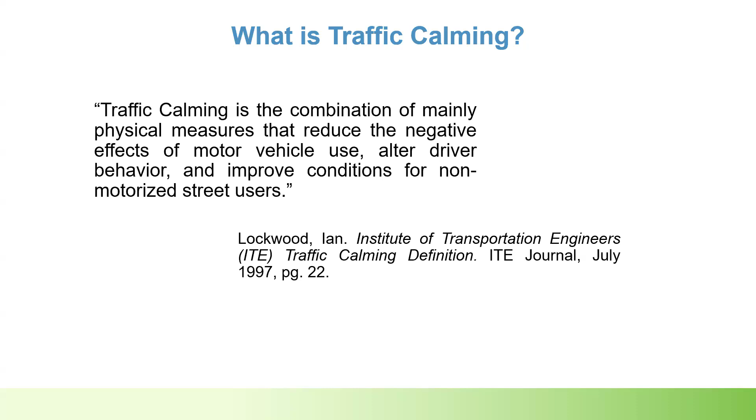The traffic calming program here in Ann Arbor is designed to provide residents with a formal process for engaging with the city in a partnership to perform a technical analysis of traffic concerns. This is for local streets, to explore potential solutions using fundamentals of traffic calming. It's a 5-step program, and Wade Trim is currently assisting with step 2 up to a portion of step 5. We'll briefly describe each step, but there is a guidebook available online, which you should have also gotten in your initial mailing with the questionnaire. It has way more detail if you want to review anything after this meeting.

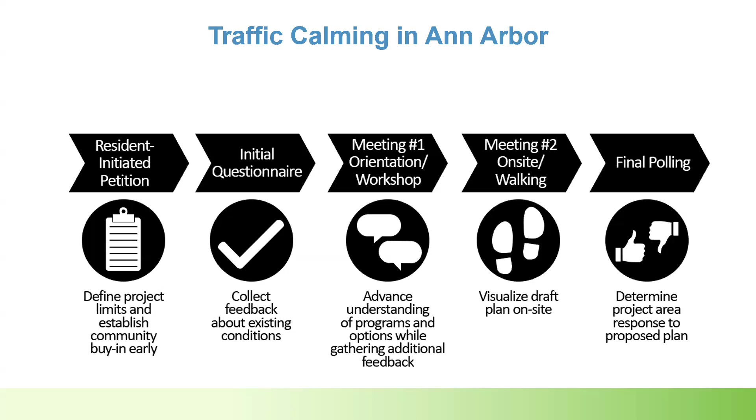Step 1 is the resident-initiated petition. This neighborhood project started with one of your neighbors acting as a petitioner who submitted a request to the traffic calming program. The request was for Redwood Avenue from Springbrook to Platt, Rosedale Street from St. Aubin to Redwood, and Springbrook from St. Aubin to Redwood. So this project area was defined by the petitioner. They gathered signatures from other residents who also live within that area and sent it out with the application to the traffic calming program.

Here's a summary of the results. The requirement for the traffic calming program to accept the request is that at least 50% of that defined project area must support the project, and then the city does a preliminary technical study that must yield at least 10 points. With this project, your petitioner collected signatures from 65% of the project area, and the preliminary study that the city did resulted in 31 points. There's a breakdown of the points posted on the project website if you'd like to check that out. In summary, yes, this qualified.

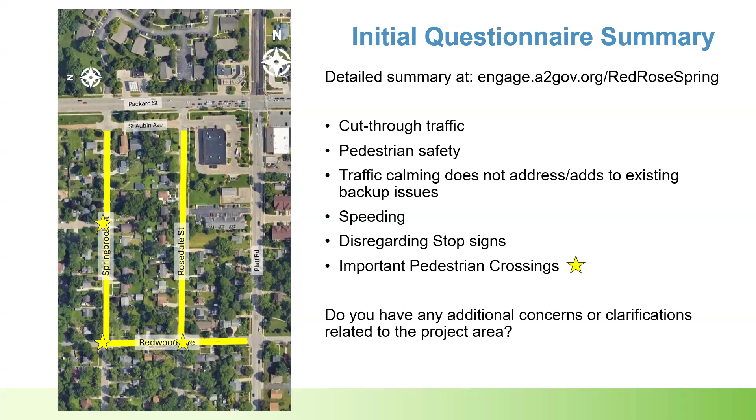And then step 3 is where we are today, so this is where most of our focus will be for the rest of the meeting. Before we present the starter idea, we'll go through an overview of the device toolbox described in the program's guidebook.

I will launch another poll here. This is asking, have you reviewed the traffic calming guidebook, specifically the device toolbox found on pages 9 to 12? I'll give you a moment there.

There was another note here: the pedestrian traffic will be hard to discuss without including the crosswalks on Platt. We are only able to focus on the study area, and the program defines only local roads. So unfortunately, if there are notes or things we want to include about the surrounding area, feel free to bring those to the table, but ultimately we can only make decisions that affect the project area.

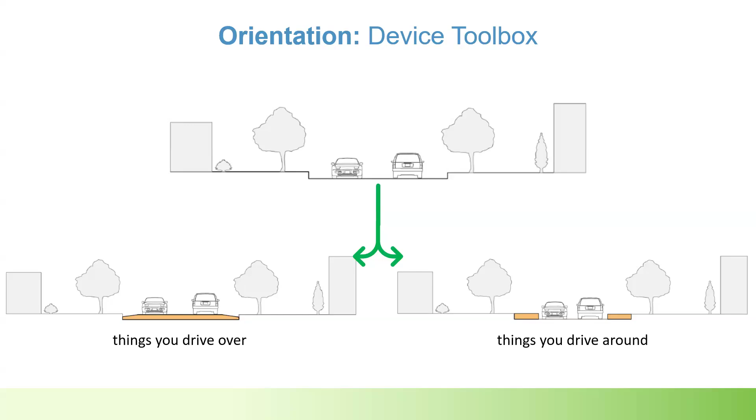On pages 9 to 12 of the traffic calming guidebook, devices are grouped into things you can drive over and things you can drive around. Disclaimer: some of the devices in the guidebook, we're not going to cover tonight. That's because they are either not feasible for this specific project from an engineering perspective, or they do not meet requirements set by city stakeholders who also provide input throughout stages of this project.

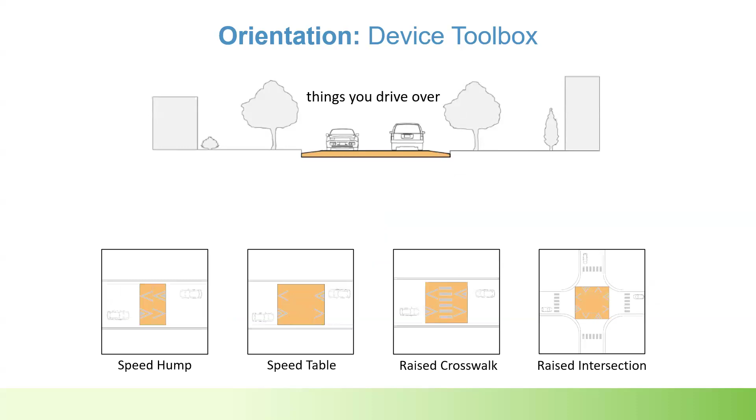So things you drive over: these are devices that slow traffic by creating discomfort if traveled over at a speed exceeding 25 miles an hour. The device toolbox presents 4 devices that fall under this category: speed humps, speed tables, raised crosswalks, and raised intersections.

We are going to skip over the raised crosswalk and raised intersection. Those devices are currently under review by the engineering and traffic departments for their ability to comply with ADA guidelines. This public engagement process is pre-approved by city council, and we want to give quick and efficient solutions for the neighborhood that shorten the timeline and are cost-efficient. So things that start to involve multiple departments or extensive engineering were originally in the toolbox, but the city is now reviewing these to see how they can better implement them.

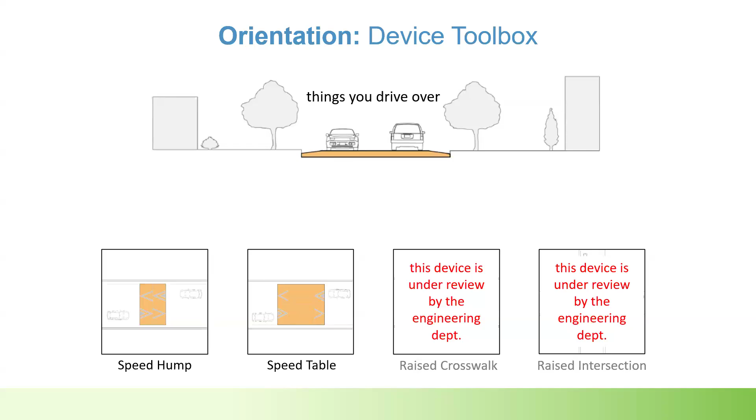Studies have found benefits of speed hump treatments may include speed reduction, traffic volume reduction, and crash reduction. There are some things to note regarding speed humps: that 3-inch height the city has set, I'm not sure when it was implemented, but it is now the city standard. I know some people reference other neighborhoods where they've seen speed humps look a lot different, but this height is designed for ease of bike usage and bike safety.

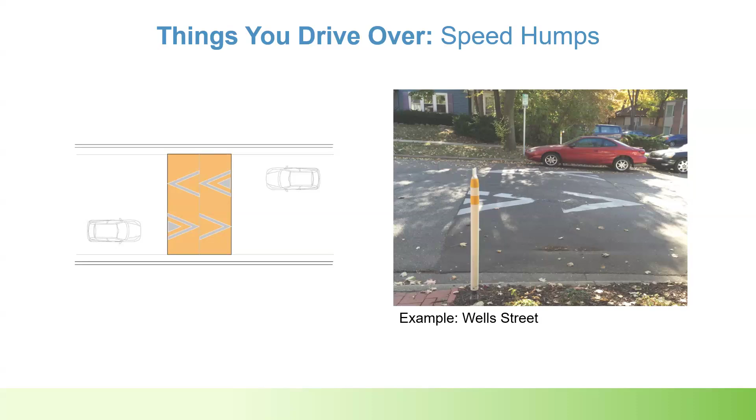Benefits of speed table treatments may include traffic volume reduction and crash reduction. Additional notes are that the speed reduction with a speed table may be less than a speed hump, the slide we showed previously. Typically we're using these in areas where, if our public school bus system weighs in, they want to see tables over the humps.

The platform width, I said typically it's 10 feet, but that can be customized. Again, the 3-inch maximum is designed for ease of bike usage, for bike safety. If previously permitted, vehicles can park on speed tables, and trash cans can be placed there as well.

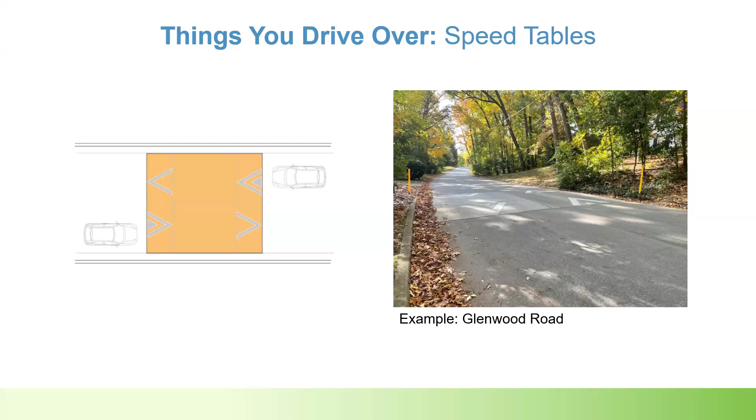We've got one. Is there any analysis on the drive-over options as to which one is most effective?

The notes that I gave about speed tables and speed humps, studies have indicated that they can lead to speed reduction and volume reduction, but there's no one best option, because a lot of times we're putting this into the context of the neighborhood we're putting it in. Are we using other devices? So we have to look at it as a whole picture. We look at the devices individually, but then we have to look at how they all fit in the neighborhood as a whole.

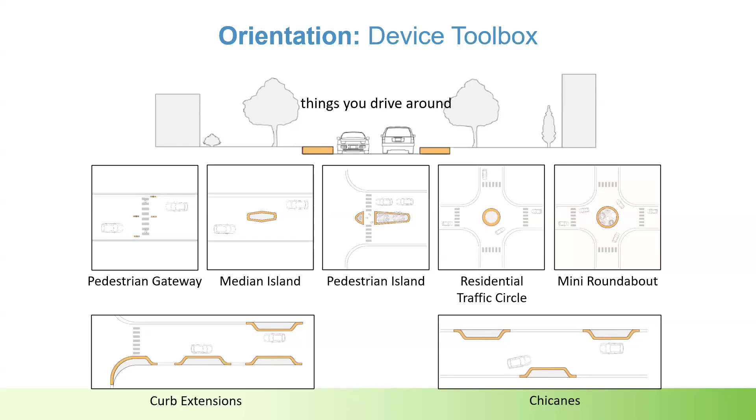The fire marshal is probably the primary party we want to make sure we get support from, because they have veto power over any of the devices that we propose. They've given us restrictions, they want to make sure their emergency vehicles can get through neighborhoods without damage to their apparatus or equipment. So this neighborhood street, a lot of these devices, it's just not wide enough for the clearance based on the standards the fire marshal has given us.

So we'll go through the curb extensions and the chicanes, which are just a different layout of a curb extension. We've got 3 different layouts here. Curb extensions can be used in several designs: the curb bump out, usually at the corner, the mid-block bump out, and if you put opposing bump outs together, they call it a choker.

Curb extensions act as an extension of the curb line. This physically and visually tightens the corridor by narrowing the street width. You can do 2 parallel curb bump outs, used to create either a single lane width passageway or just a choke point. If you alternate them, like in this slide, that's a chicane, where you alternate the bump outs.

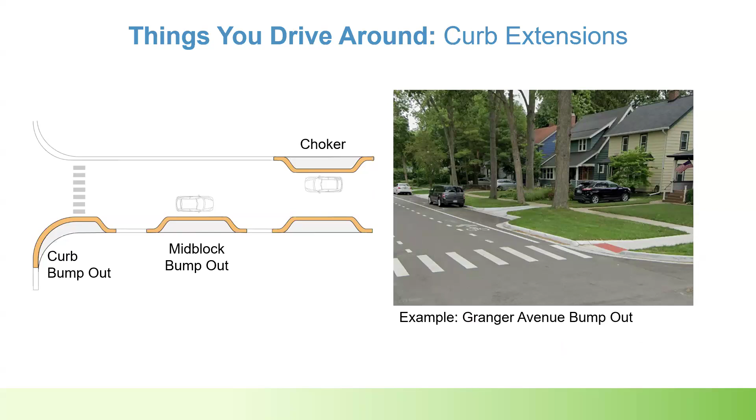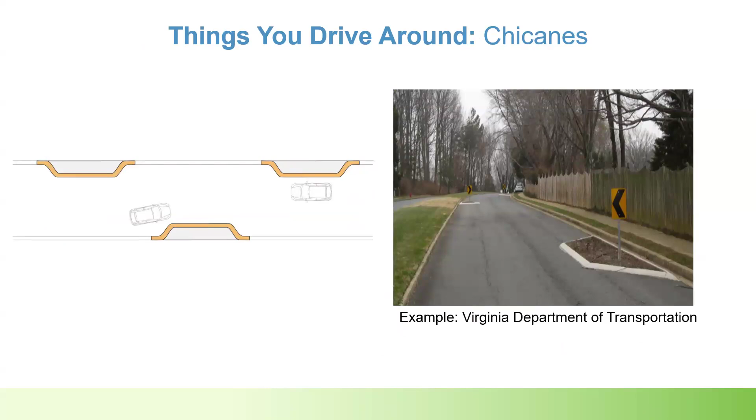And here we've got that other slide with the alternate design, the chicane. Again with this, we have to consider drainage, whether or not we're losing on-street parking, what the increases are to maintenance, and making sure we're maintaining that minimum width for emergency response vehicles.

Lastly, the guidebook also describes a neighborhood gateway treatment. This is a physical landmark that indicates you're changing from a higher speed arterial road to a lower speed, like a residential or commercial district. Installing these gateway treatments can increase awareness for residential speeds, and with that, they may require additional right of way. With this kind of installation, the neighborhood or adjacent property owner would bear the landscaping, installation, and maintenance costs.

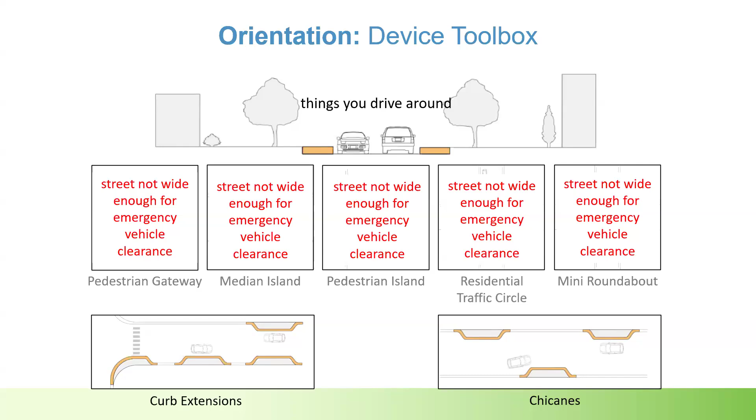Thanks, Anne Marie. Let me just go here. All right, I've got a couple notes. I know we still have some questions that haven't been answered in the Q&A, but I am going to move on. We're at about 7:13 right now, so I want to make sure we're able to have proper discussion around the starter idea.

If you want to see other examples of how some of the devices are used, there's an interactive map on the traffic calming website. Project areas are color coded to show what's been constructed already. You can look on the interactive map, or drive to the site and take a look at what's in progress and what may not have qualified.

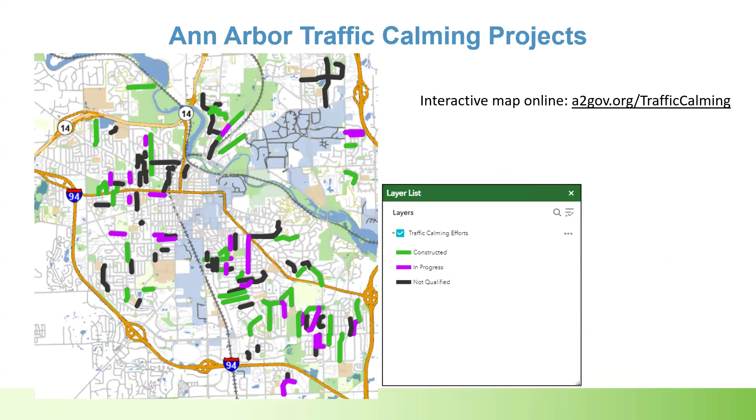With that, I'm going to hand it off to Christina, and she's going to lead the exercise. I will still be in the Q&A helping monitor and back up.

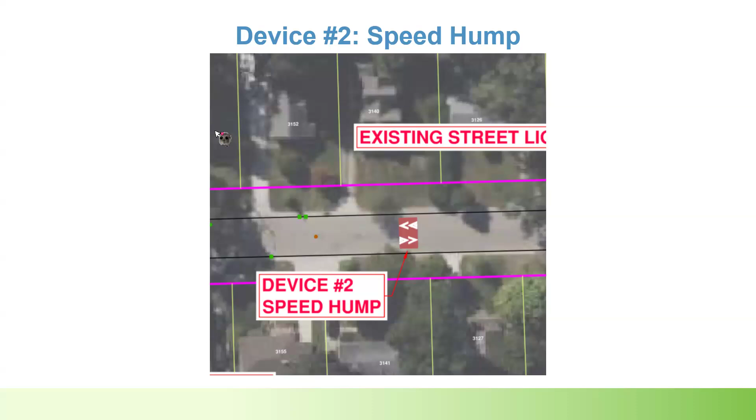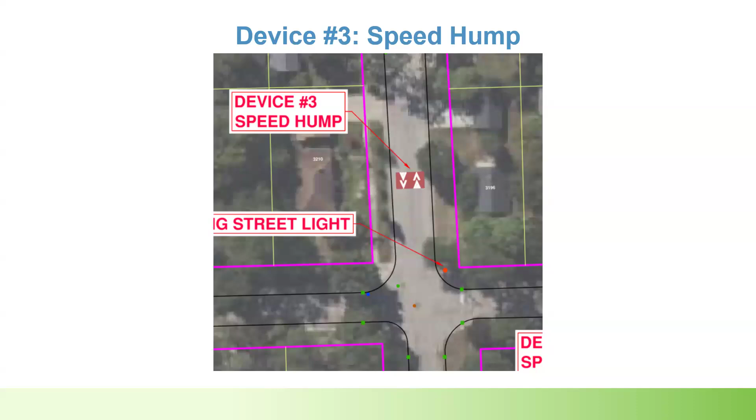I just want to add, Christina, there was a comment or question that popped up in the Q&A asking if this is one of two plans or if this is the only test plan. So this is just our starter idea. We're gonna get feedback tonight, and then when we meet again at our next meeting, we'll have possibly made adjustments to the plan. So we'll see the next iteration of it at meeting number 2.

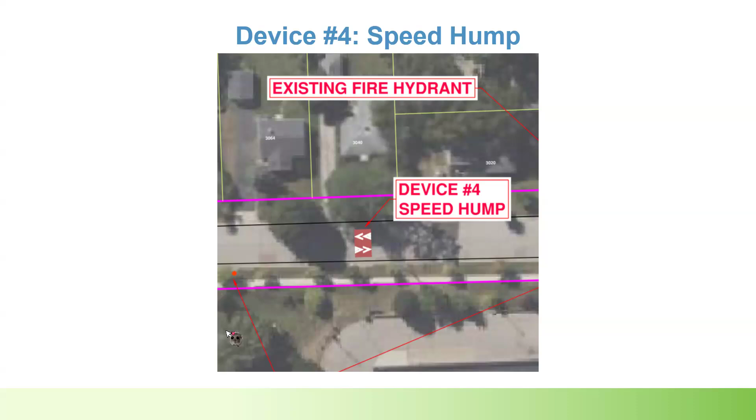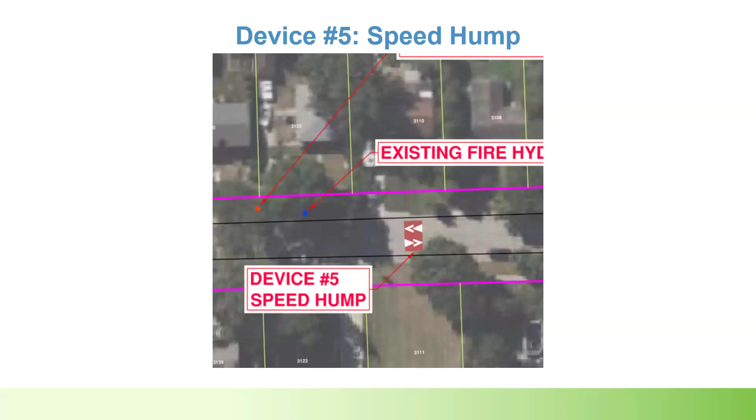All right, this is a close-up of device number 5, which is a speed hump near on Rosedale Street near 3110 Rosedale. Device number 6 is a speed hump on Rosedale Street near 3166 and 3167 Rosedale.

Sabrina, would you like to speak on the ones on Rosedale? Well, just reiterating my concern that speed bumps are a nightmare for me and painful. I'm wondering why there are 4 on Rosedale. There were 2 on Springbrook. What's the thinking there?

Springbrook does have a cross street that sort of rearranges how devices can be laid out. There is no cross street on Rosedale, but we are gathering your comments and they will be incorporated into the not starter idea, the preliminary plan.

Yeah, I mean, that would be just the worst thing for me. And these are bumps you're talking about, not speed tables. They are speed humps. So if you think of a speed bump like you might see in a grocery store parking lot, those are very severe. They're very short, usually about 3 feet wide and 4 inches tall. These would be 12 feet wide and 3 inches tall, and they are rounded. So we call them parabolic in shape. They taper up gradually to a peak rather than just a lump in the middle of a road, if that makes sense.

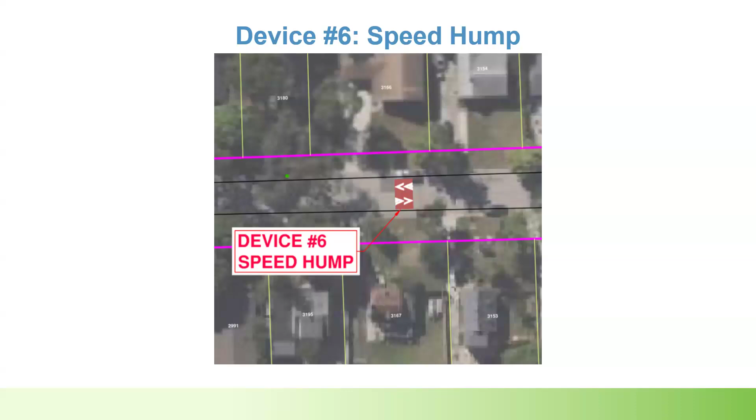Thank you very much. Just to address one comment in the Q&A, zoom in on the picture again. There are 3 on Rosedale, and when I say they're near an address, it's just phrasing. They're just in proximity to that address.

If that answers your question at all, Jenny. I was just trying to clarify for Sabrina. There is one very near her house, I believe, in this diagram, but only 3 on the street.

And then, Anne Marie, I'm going to allow you to unmute to ask your question. So for the lady who is concerned about the speed humps as opposed to the wider ones, is there one like that she could experience in existence so that she might feel better about it? The lady on Rosedale who has the issues with the bumps.

Yes, there are. So there are existing speed humps throughout Ann Arbor. I know we referenced a map that you can click online that will show you all existing, under construction, and proposed traffic calming locations. The one we like to use as an example is on Wells Street. That one is recent. It has that newer parabolic shape, and is the example that most people drive by and go, okay.

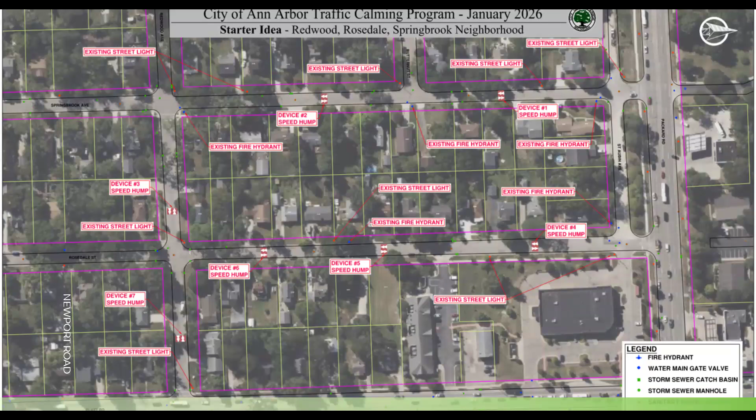Okay, thank you very much. All right.

So we've shown the overall image again. And device number 7 is the final speed hump near 2995 Redwood Avenue and also 3210 Platt Road.

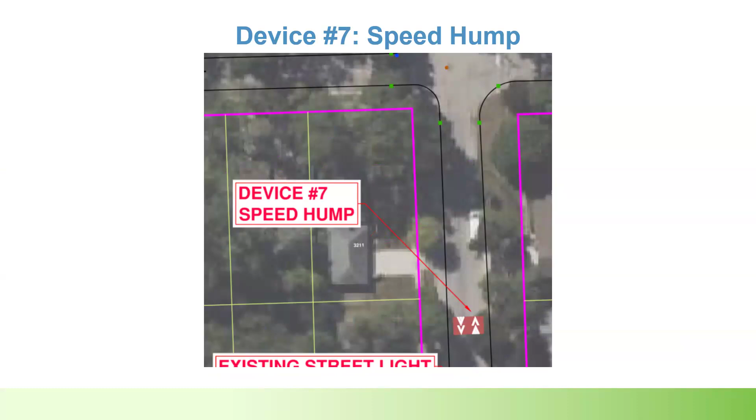The next few slides will be asking questions about each device. So you will get that pop-up voting apparatus either on your telephone or on your computer screen. If you are calling in, you press *9 in order to cast your vote. And we will be going through location by location and voting on the traffic calming measures as drawn.

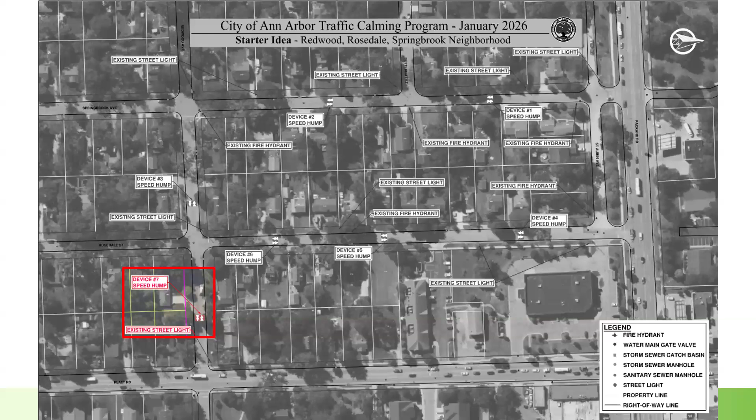Thank you very much for all of your comments on the polls and throughout the course of this meeting. Over the next couple weeks, we will post today's presentation and recording to the project website. We will also post a summary of today's polling and use the feedback to create a preliminary plan.

The next step will be meeting number 2. Meeting number 2 will consist of 2 parts: a self-guided tour, and a Zoom meeting. That Zoom meeting is scheduled for Thursday, March 5th.

For the self-guided tour, you will receive a mailing packet at least 2 weeks ahead of the Zoom meeting. The packet will contain device images and descriptions, which can be used to complete a self-guided tour prior to the meeting.

Approximate device locations will be marked in spray paint on the pavement and display the device image and description on a temporary sign near each location. You can also use Google Street View to conduct the self-guided tour.

If you happen to notice any stakes with paper stapled to them very close to the road near your property, that's us. Please don't pull them out. We would really appreciate if they could stay up so people can conduct the self-guided tour, as they indicate device locations and device types so your neighbors and other residents can see what their options are.